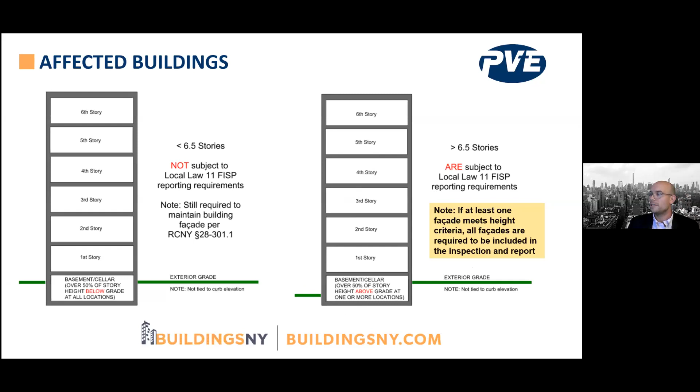If you look at the building on the right, it looks about the same, but you'll notice the grade here is a little bit lower. So the basement or cellar, over 50% of the story height is above grade at one or more locations. Then that facade would be above 6.5 stories, and the entire building would then be subject to Local Law 11 FISP reporting requirements. It's important to notice it's not just the facade itself that's above 6.5 stories, it's the entirety of the building. And all facades are required to be included in the inspection and report once that height requirement is triggered.

So who can file these reports? It's the designation of a qualified exterior wall inspector, or QEWI, who is a registered design professional with at least 7 years of relevant experience with facades over 6 stories in height.

So that 7-year requirement is underlined because that's updated from Cycle 8. An oral interview with the Department of Buildings Facades Unit, as well as documentation verifying and validating that experience, is required for approval as a QE, which gives you the status enabling you to log in to the DOB NOW system and actually file those reports.

So the 7 years of relevant experience is an increased requirement in Cycle 9, but those professionals that had a valid QE status with the department prior to the start of Cycle 9, if you were filing reports in Cycle 8 and previous, you do not need to sit for an oral or written test to update or maintain your qualifications. You're grandfathered in. So this is only for new QEs applying as of February this year.

So when the QE files the report, it basically classifies the building into 3 separate categories. You have safe, SWARMP, or unsafe. A safe building is a building that, in the judgment of the qualified exterior wall inspector, does not have any conditions that would cause it to become unsafe or hazardous during the next 5 years.

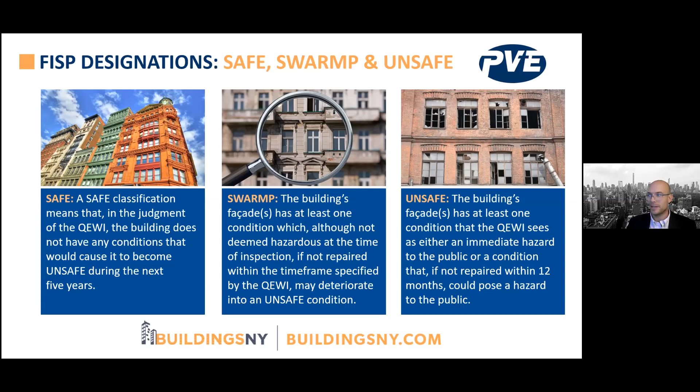For SWARMP, you need to provide that recommended date of when this needs to be repaired prior to 5 years in the next cycle, but it will not be accepted as SWARMP if the recommended repair date is within 12 months. That would fall into the unsafe bucket, and that's kind of where that dividing line is.

So if we take a look at Cycle 8 that just closed in February of this year, looking at the filing statistics, you'll see about 75% of buildings fell into either the safe or SWARMP category, relatively even split there, 38 and 37%. But 25% of buildings were filed as unsafe, or there was no report filed at all. It's 13% and 12% there respectively.

This is a big focus of the department and why these requirements have increased. It's really to incentivize owners with some of the penalties that come along with filing unsafe or not filing reports at all to perform these inspections and to get these compliance reports in to ensure the safety of the public.

So if you total all those numbers in Cycle 8, it was about 14,500 or so, but with new, taller buildings going online every day, it's now estimated that approximately 16,000 total buildings will be in the FISP universe that require 9th cycle filings, and the 9th cycle just started earlier this year.

So when do you have to file these reports? The overall 9th cycle is a 5-year span, but it's broken into different subcycles, so not all buildings file at the same time. As you can see there, there's 3 subcycles, 9A, 9B, and 9C, and they have a staggered 2-year filing window. The different subcycles that you fall into are broken up by the last digit of the block number.

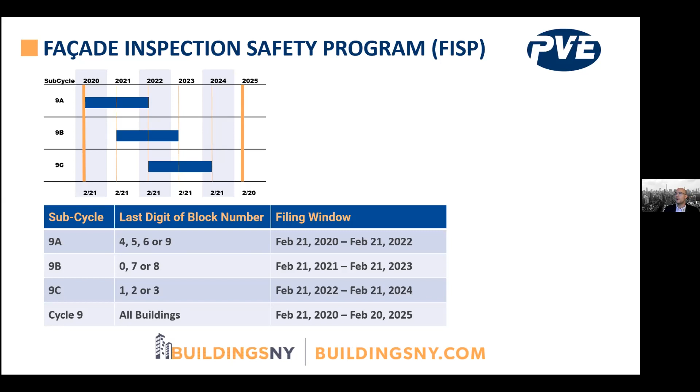To avoid no report filed penalties or late filing penalties you need to file during your designated subcycle, but all buildings need to file a report during cycle 9. Otherwise, after February 20th, 2025, you can no longer file any cycle 9 reports, and there's penalties associated with missing that that'll accrue until you are able to submit an acceptable report.

So what are the inspection requirements and what do you have to do here and document when you file these reports? So it really focuses on 100% of the exterior walls and appurtenances. So you need to comment and review the type of construction of the building, the age of the material, the building's exposure to environmental conditions, which might be detrimental to the building envelope, the facade's history of maintenance and repairs

and repair campaigns that have happened on an ongoing basis, the different building materials that make up the facade and the building envelope, whether it be terracotta, masonry, the brickwork, mortar, metal anchors and supports, the lintels and shelf angles, etc. And then this also encompasses all our appurtenances, which are things connected to the facades, whether that be balconies, the railings, fire escapes and fire escape stairs, awnings, flagpoles, etc.

And also you need to comment on the water tightness of the building envelope and the facade. Water infiltration is a leading cause of detrimental effects to facades, and especially in a city like New York where there's a lot of freeze-thaw, that can cause some real issues.

So it's up to the QE to then design a compliant inspection program. And it varies kind of case by case for each building based on the different materials, height, geometry of the building, etc. So there may be special or additional inspections or sounding procedures required on certain types of buildings. A good example that's a very focused effort right now is terracotta buildings or brownstone buildings.

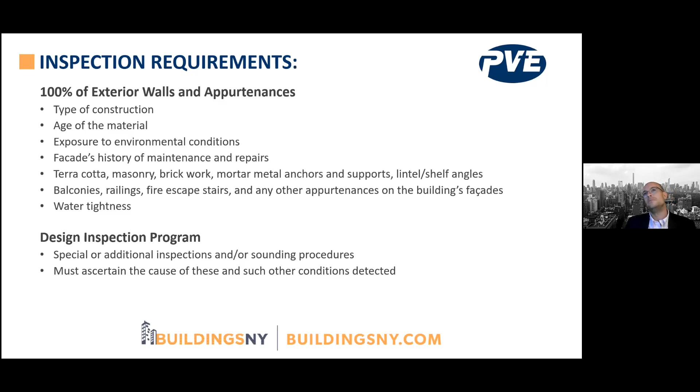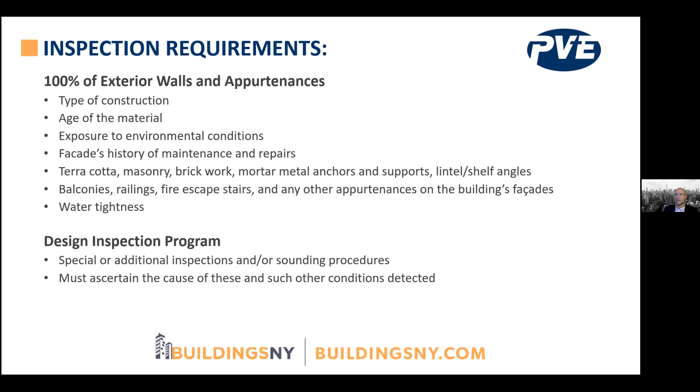And the goal of the inspection program when you're identifying these deficiencies is to try to ascertain the cause of these and the conditions detected. You're not looking to fix the symptom. You're really looking to fix the actual cause so that whenever the repairs are performed, this is not a recurring issue that causes a hazardous environment.

So to do that, you have visual inspections, which is from all available vantage points, and you have a physical, hands-on, up-close inspection. This is one of the biggest increases from Cycle 8 and Cycle 9 in the requirements. The previous requirement for the physical examination was 1 physical examination hands-on per building on a street-facing elevation. So that's from grade all the way to roof level continuous. Previously, it was just 1 on a street-facing facade.

Now, the new requirement is a minimum of 1 physical examination for every 60 linear feet of facade along a public right-of-way. So the definition in the building code of public right-of-way is a public street, avenue, sidewalk, roadway, or any other public place or public way.

And to get some clarification here, how it's really defined is the elevation of a facade is considered part of the public right-of-way if a member of the public who is not associated with the property in question can freely walk up to the facade of the building, even if the facade is on private property. So if you're on the street or sidewalk and you can get to this without some form of physical barrier restricting your entry, that would be considered part of the public right-of-way.

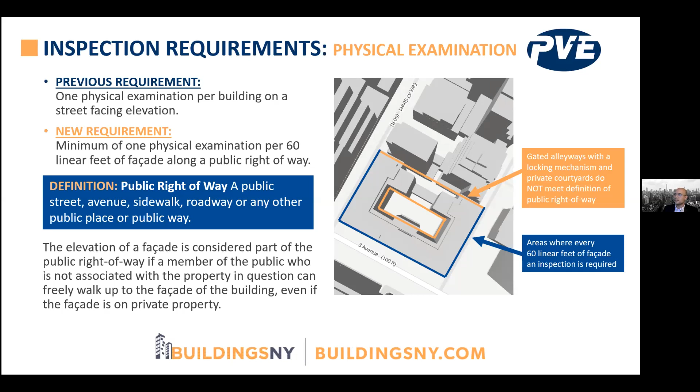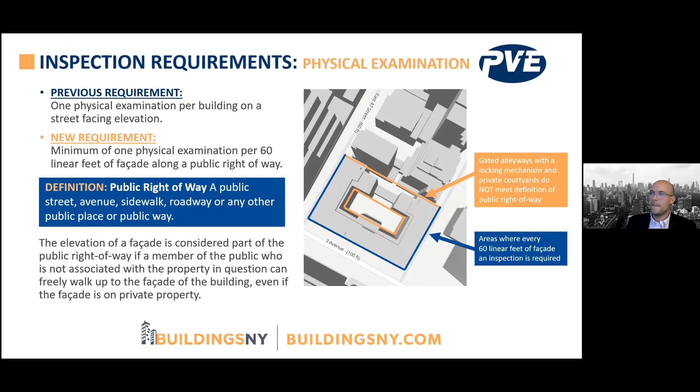The areas in blue are along the street-facing facades, along the public right-of-way there, so those would go into the areas that would be required to fall under the physical examination requirement. So how you calculate the number of drops and where that is does get a little tricky. So thankfully, the building department did put out some clarification here. And these are the exhibits from their frequently asked questions from earlier this year.

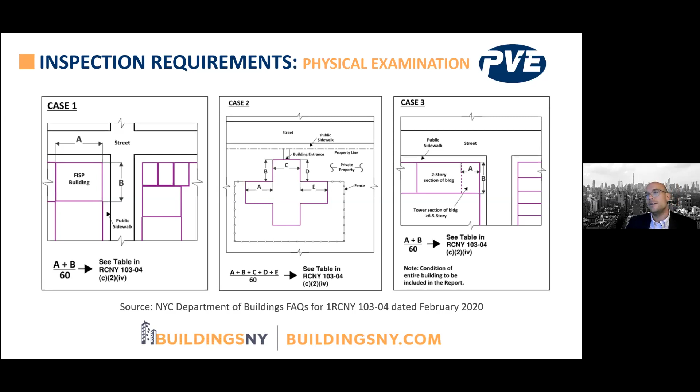So how you calculate the number of drops required is you take the total linear footage of the areas that are in the public right-of-way and you divide it by 60. And then you round up to the nearest whole number. So case 1 is pretty standard. Facades there labeled A and B are facing the street and sidewalk. The other facades are facing adjacent buildings, so they are restricted and do not fall under that. So you take the linear footage of A and B and you divide it by 60, and then you round up to the nearest whole number, and that's the minimum number of drops required to satisfy the physical examination requirement.

If you look at case 2, this one gets a little bit more complex. You have some jogs, you have some ins and outs of the building, and it shows out there the public sidewalks out near the street, and you have private property from the property line in. However, since there's no physical barrier preventing people from that public sidewalk to get up to that facade, the elevations labeled A, B, C, D, and E there all fall under the physical examination requirement and are considered part of the public right-of-way.

So the fence there is a physical barrier and the other facades do not fall under that requirement. So you take the total linear footage of all of those jogs of A through E and you divide it by 60, round up to the nearest whole number, and that is the minimum number of drops required. It's also important to note that where you locate these drops, once you determine the minimum number, you can't cluster them. You're supposed to spread them out to really get a good representative sampling across the entirety of the facade.

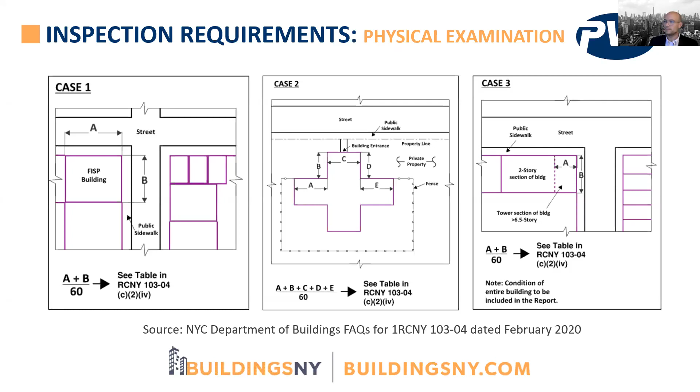So another requirement that's added to this physical examination is you need to have dated photographic documentation uploaded in the supporting documents that shows the QE or their delegated individual actually performing the hands-on physical exam. So this picture, you can take it as a selfie. It's recommended that someone else take that picture for you so that you can be focusing on that. So a contractor can take these pictures, but we really want to have some photographic evidence of the up-close inspection being performed and ensure that those photographs are dated so it can be time-stamped, knowing when that inspection was performed.

Inspections are able to be carried out by individuals other than the QE under certain circumstances, but it's important to note that the full and final responsibility of the filed FISP report lies solely on the professional QE who's turning in the report under their name.

One other item with the robust increased requirements of the physical examination: it was always required that the up-close was performed within 1 year of the report submission date. But with the addition of all these drops, only the final close-up inspection is required to be within the 1-year time frame, as long as the full hands-on physical examination requirements were met within a reasonable time frame prior to that final inspection. So this determination is handled on a case-by-case basis, and as always, is at the sole discretion of the Department of Buildings. So if you're unsure, you can get them to weigh in on it.

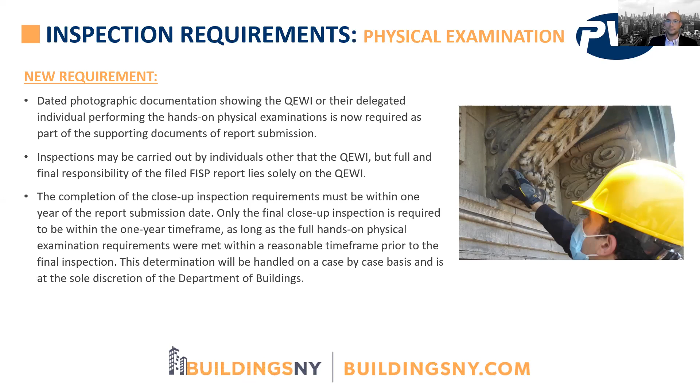Another big change starting in cycle 9 is the requirement of cavity wall probes. So starting in cycle 9, in all odd cycles, it will require probes to be performed at every one of those up-close physical examination locations if your building is a cavity wall building.

So the definition of a cavity wall is an exterior wall system consisting of an exterior veneer with a backup wall, whereby the exterior veneer relies on a grid of metal ties to the backup wall for lateral stability. The 2 layers of the wall are separated by an air cavity, which may or may not be filled with insulation. So the diagram there to the right shows a cavity wall, and essentially you have that cavity that's being spanned and the veneer is being tied back by these metal ties.

So these cavity wall probes are intended so that a representative quantity of the ties can be exposed, so the QE can report on the presence, condition, and spacing of the ties, as well as the shelf angles, the substrate material, and all other components of the wall assembly, and really get a good understanding of what's going on behind there. The QE is now required to provide a statement regarding the condition of the wall cavity assembly and the ties, and if the observed ties met the relevant code at the time of construction.

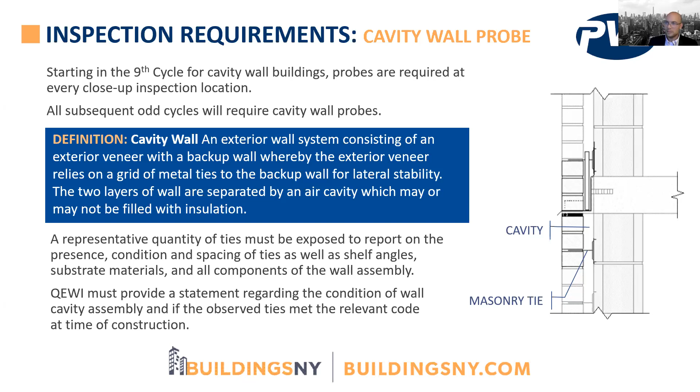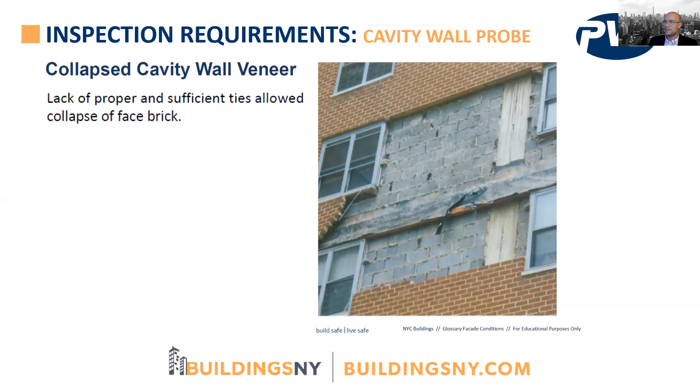So why this is important is because you can have some pretty catastrophic failures if those ties are degraded. Here's an example where the spacing and the presence of the ties were much lower than they were required to be. The lateral stability of the wall was compromised, and once it failed, entire panels between the shelf angles, which was entire floor height of brick, just kind of let go and collapsed. So getting an understanding of the condition of these wall ties and the spacing and just their very existence is very important.

A popular question with all of these new probing requirements is, does the probing of a cavity wall require a permit and a sidewalk shed? So, per RCNY 101-14, Table 9, Item 1, probes involving the removal of less than 10 square feet of unit masonry with a maximum dimension not to exceed 4 feet in any direction in any 100 square feet of wall area, where the cumulative area of all probe openings on all facades does not exceed 150 square feet, would not require a DOB work permit. So the intent is that most of the probes that would be required under this new requirement would likely fall under this, where it would not necessarily require a DOB work permit because it would fall under the limits prescribed.

This type of work may also not require a sidewalk shed if the facade material in its current state is deemed by the QE able to handle a probe without destabilization, and adequate precautions are taken below the area of work, such as blocking off the area below, having flagmen at street level, and properly redirecting pedestrian traffic when the probing occurs. That being said, proper safety precautions are always required, and coordination with Landmarks is also required if applicable, if you are a landmark building, changing bricks and mortar and whatnot. And when the facade conditions being probed are suspect, or are in areas over heavy pedestrian traffic, or fall in areas over entrance egress doorways, etc., they may be subject to enhanced safety measures, including but not limited to sidewalk shed installation.

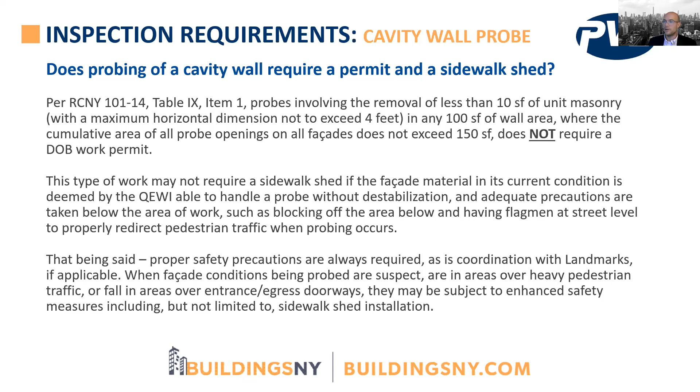So kind of in summary, a permit and a sidewalk shed is not always required, but that doesn't mean that they're never required. If you're probing in an area that looks suspect because the wall may be bowing, you're going to want to make sure that you take the proper safety precautions, especially if it's in a heavily trafficked area or over an egress doorway. But if there's any uncertainty on this, it's always recommended to reach out to the Buildings Department prior to performing a repair campaign, as it's always up to the department's discretion.

Another popular question: is there any exception to the probing requirements? And the answer is yes. There's three different ways that it can be waived, and that is when a repair campaign addressing the cavity wall ties has been completed within 10 years of the filing deadline, and the owner or the QE provides proof of such repairs, such as photos, inspection reports, construction documents, etc. If you can submit that, then you may be able to have the probing requirement waived.

Similarly, if it's a pretty new building and the first temporary certificate of occupancy or certificate of occupancy was issued within 10 years of the filing deadline, and proof of the proper wall tie installation is provided, again with photos, reports, construction documents, etc., you can be waived from this requirement. And the third one is if an alternate method of determining wall tie spacing is proposed by the QE and accepted, so it has to be accepted prior by the Department of Buildings, you can be waived of that requirement.

So you can use other methods of detection of the wall ties, but you need to ensure that whichever method you choose, you can satisfy all of the inspection requirements and the asks to kind of qualify the information that needs to be submitted regarding the wall tie spacing and condition.

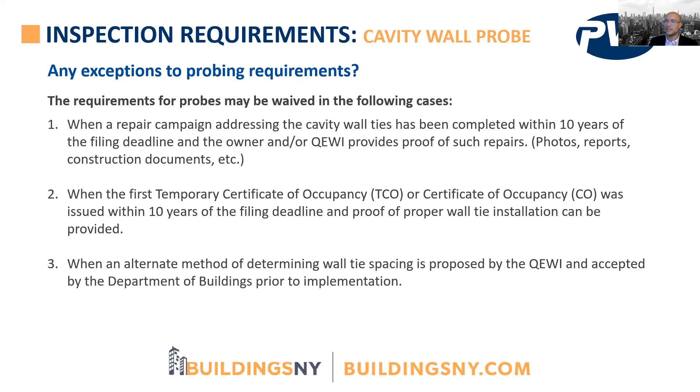So now when we get to what's actually required after you perform these inspections and turning in the report, a mapping of all of the conditions is a requirement whenever you're submitting these items. So conditions noted during the inspection must be mapped on either elevation drawings, marked up elevation photographs, or a combination of both, as long as they can provide a clear depiction of the type and location of all the facade conditions noted. So here you see an elevation photograph.

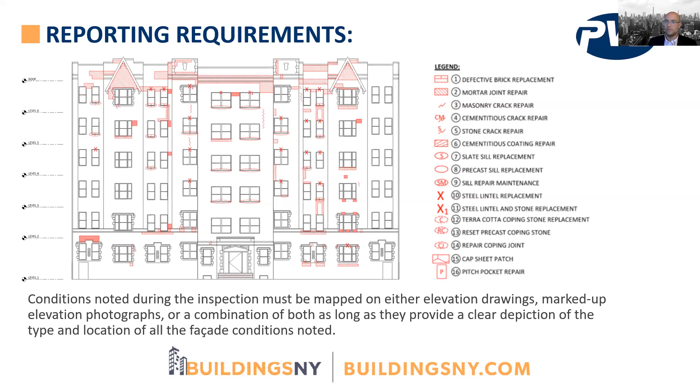There's a bunch of different items that are kind of mapped there. And then there's a legend on the side that says, look, here's the elevation, here's the different locations of all of the items that we saw, and here are the different types of deficiencies that we saw in those areas. Many a time you'll see that we'll attach photos to the different areas as well, so it kind of provides a photo key that you can match the location and type of condition to a photo up close, kind of depicting that item as well.

All the information from the inspection is then filed by the QE online by filling out information in the form-based web application through the DOB Now Facades portal. So a little screenshot of one of the screens is there on the right. You need to fill out all the information on those various tabs and upload supporting documents as required. Owners and their representatives must also have an account on DOB Now and log in to sign off with their acceptance prior to the QE being able to submit the report.

Safe reports, as an updated requirement in Cycle 9, must have a minimum of 3 condition photos specific to facade elements that represent typical conditions. And these photos are separate and in addition to the required elevation photographs. So now, whether it be a cornice or lintels or windowsills, you need to have kind of a representative photograph, even if your filing is safe, of what those buildings look like outside of just the overall elevation photographs. Cavity walls, as we discussed before, will require additional photos as a supporting document to show the state of the existing structure, along with the QE's commentary on the condition of the cavity wall and wall ties.

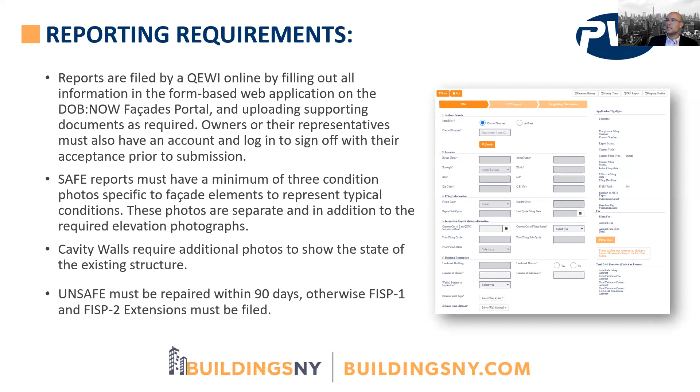And if you do file as unsafe, items must be repaired within 90 days. And if they cannot be, then you need to file FISP 1 and FISP 2 extension requests to ensure that your building stays within compliance. And a little bit more on that, per the latest revision to the facade rule, RCNY 103-04, which is Local Law 11, effective February 20th this year, an unsafe recommended date represents the recommended time frame for repairs to be performed to bring the building to SWARMP or safe status. So if you're filing this as unsafe, you need to give an unsafe recommended date by which these things need to be repaired to at least bring it to SWARMP, if not safe.

And that date that you provide indicates the date by which the work will be completed. This is not the date when recommendations were issued or the inspection was conducted, but the date that the repairs must be completed, as indicated and recommended by the QE. So a FISP report with an unsafe status cannot be filed without an unsafe recommended date, and time extension requests are required to be filed every 90 days until reaching that recommended date. You will now not be allowed to file time extension requests, which are FISP 1s or FISP 2s, that extend beyond the unsafe recommended date.

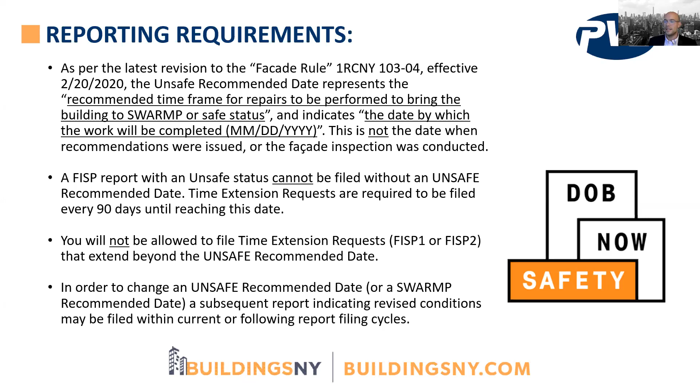So if you're filing these extensions and you're not going to meet the recommended unsafe date, then you now need to file a subsequent report in order to change an unsafe recommended date or a SWARMP recommended date. If you're filing to change those dates, you now need to file a subsequent report indicating revised conditions and the reasoning of why that recommended date has changed.

Another one of the requirements now is that whenever you file and get an accepted report, you must download and display your FISP certificate. So these certificates must be displayed in building lobbies, similar to what's done with elevator inspections or the new Local Law 95 energy grades, or the restaurant health grades. These certificates can be downloaded through the DOB NOW Façades portal. So if you as an owner or manager have an account, you can download this, or you can ask the QE that filed the report for you.

So what are the filing fees that are associated with filing these reports? The initial report filing fee, these are new as of cycle 9, have been updated to $425 for the initial report. And then if you're filing an amended or subsequent report, an amended would be if you filed as unsafe and you're amending the condition to either SWARMP or safe, and a subsequent would be if you filed an accepted report as SWARMP and you're just filing another SWARMP or safe report, that would also be $425.

So really the report filing fees themselves are $425, and if you're filing an extension request every 90 days for an unsafe building, that would be a $305 filing fee. And those fees can be paid just through DOB NOW and the Façades portal for your report. There's just a little tab on the side there that you can pay by credit card right through the website itself.

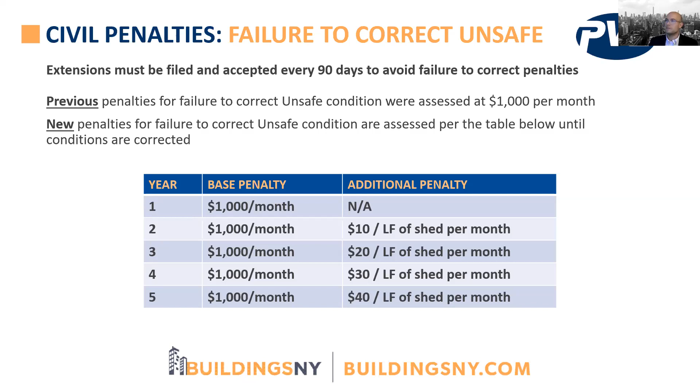The last new penalty here that's kind of different from cycle 8 is that now if you do not correct a SWARMP condition from the previous cycle, it automatically becomes unsafe. That has not changed, and that has been a requirement for a few cycles now. In cycle 9, you will now be assessed a $2,000 penalty if you filed administratively unsafe for failure to repair a condition that was noted as SWARMP in the previous cycle.

So as you can see, the penalties have increased pretty substantially from cycle 8 to cycle 9, as have the qualifications for the inspectors that can perform these investigations and file these reports, and the requirements of the inspections themselves. So there's a lot of information out there, and I hope to have covered a lot of it, but I'm sure there will be a lot of questions. So I will now turn it back over and answer any questions that may have come in, and appreciate the time.

Sorry, y'all, I was muted. Thank you, Jameson, so much. There was so much great information, and we do have a number of questions we can go through. I'll volley them to you kind of after they came in, if you don't mind. Sure.